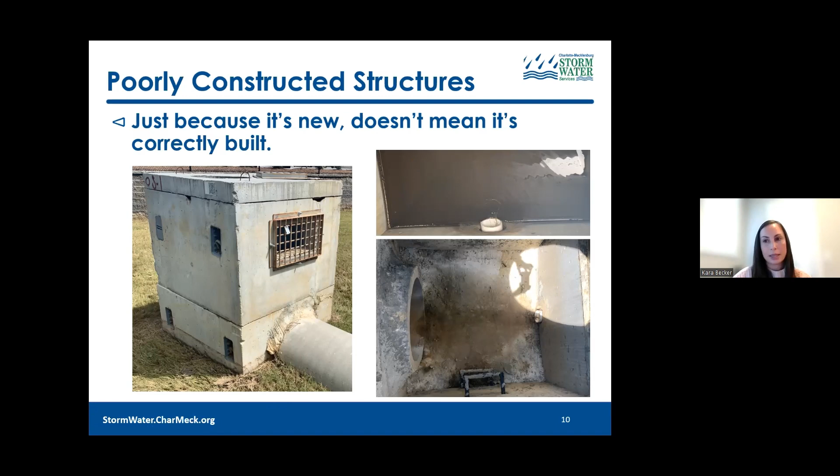And then unexpected encounters - we've actually run into people living in outlet structures. They just pop the manhole off and it provides a structure and a dry place for them to live in. So always make sure that when you're opening manholes or you see anything laying around there, like trash that looks like somebody is living there, make sure to avoid those places or make sure you have a buddy there just in case.

And also, make sure you're wearing good soled boots. We have run into needles, glass bottles, different things that we can step on that would harm us. You just want to make sure that you're really watching where you're walking when you're walking around the SCMs.

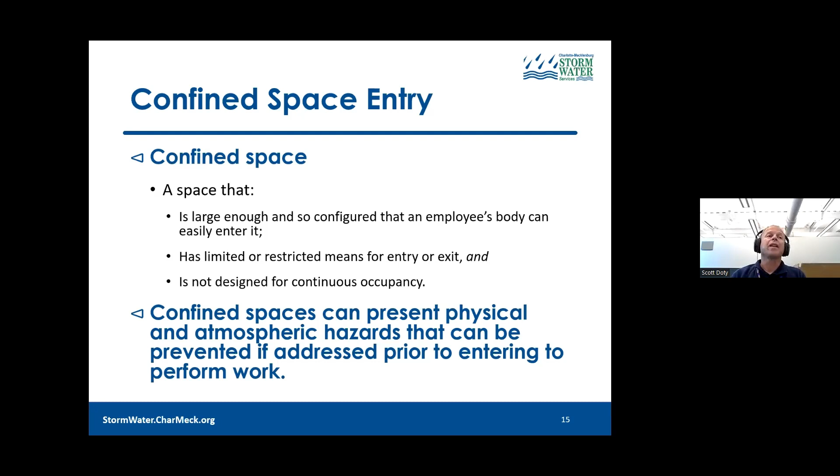Confined spaces can present physical and atmospheric hazards that can be prevented if addressed prior to entering to perform work. If you look into the 1910.146 general industry OSHA standard, or the 1926.1203 for construction, those are what govern how you go and perform confined space entries, whether it's general industry or you're actively constructing a project.

What is a non-permit confined space? It does not contain, or have the potential - and that's the big key right there - to contain any hazard capable of causing death or serious physical harm.

Whereas a permit confined space is one that has one or more of the following characteristics: contains or has the potential to contain a hazardous atmosphere; contains a material that has the potential to engulf an entrant, which is where you'd think of silos, or on active construction sites where you have deep excavations that can engulf the entrant; has an internal configuration such that an entrant could be trapped or asphyxiated by inwardly converging walls or by a floor which slopes downward and tapers to a smaller cross-section; or contains any other recognized serious safety or health hazard.

Prior to work starting, a competent person must evaluate the work site. What constitutes a competent person? A competent person must be designated by the employer and have knowledge of OSHA standards, ANSI standards, NIOSH standards, the same standards that Kara mentioned before, and be able to identify and actively and efficiently correct those hazards.

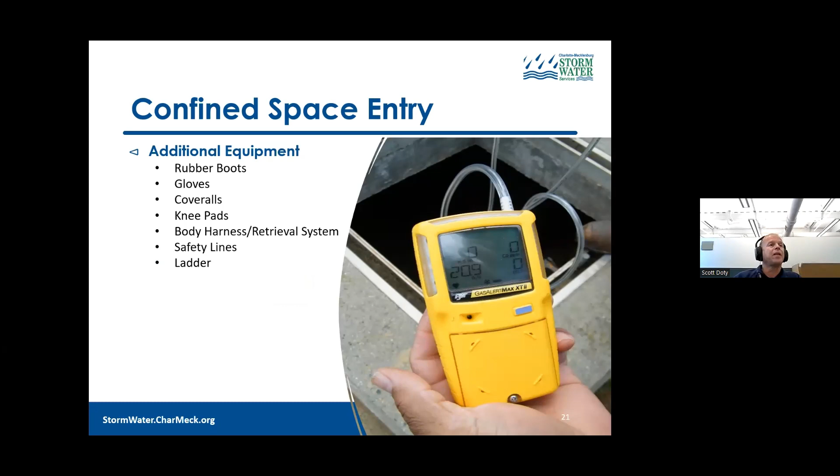Additional equipment: rubber boots, gloves, coveralls, knee pads, and a body harness retrieval system. You also want to make sure that daily inspections have been done on the harnesses you're wearing—make sure there's no cuts or tears. Your retrieval system should meet the new standard that ANSI and OSHA implemented earlier this year. You want to make sure you have your safety lines and a ladder if needed.

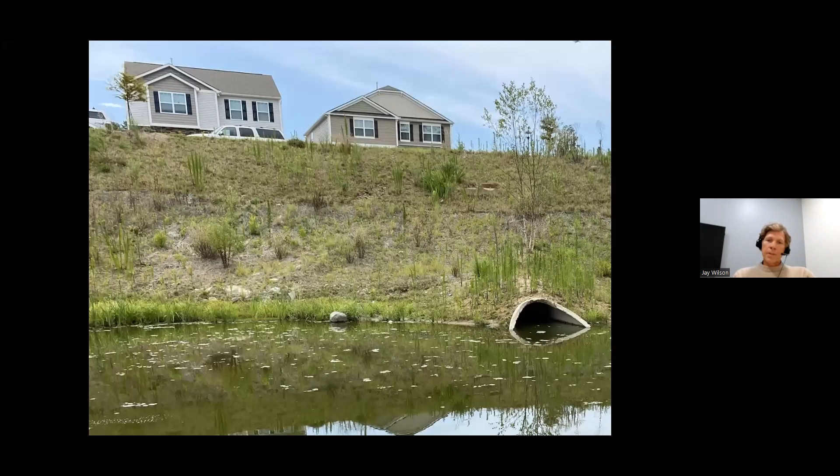Another SCM where you can see the matting on the lower part of the slope still, but it didn't help nurture the turf grass crop that was there, and you're seeing a lot of volunteer vegetation. So from far away, it might look like there's adequate vegetative cover, but if you look closely, you'll see that the majority of the ground surface is not shielded from raindrops by the vegetation, and that exposes the area to ongoing erosion and unnecessary maintenance of your SCM.

This is a common condition and something you should hopefully keep an eye on when you're out in the field. Regulators, while you're there during construction, these are things to point out and talk about during active construction, so they don't become an issue right at the jumping off point. And if you're designing or building and turning these things over, then this is something you would do well to think about early in the process: the final stabilization.

Inlets and flow diversion structures. A lot of these SCMs have flow diversion structures to divert a certain portion of the flow to the treatment device and allow the remainder to bypass the system. If you have a flow diversion structure upstream from your SCM, it's critical to ensure that it's operating as designed and free of trash, clogs, or some sort of damage.

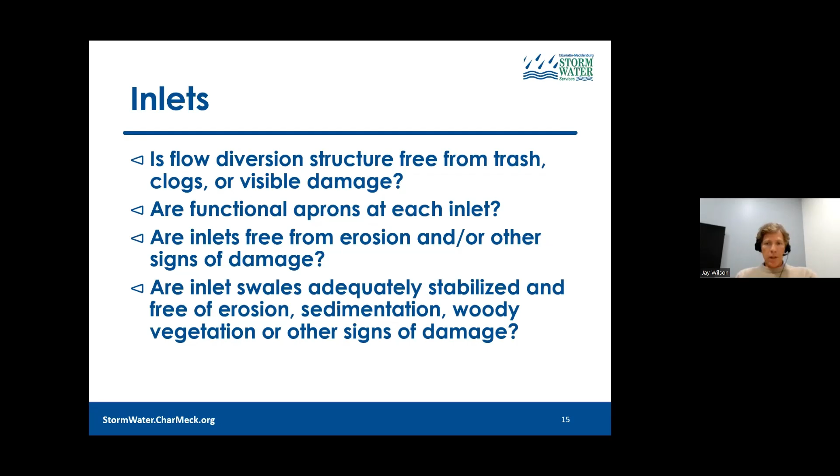Again, you need to have at least 70% cover with a permanent regenerative type turf grass or maintainable vegetative cover that is appropriate for the uses required from the facility.

Forebays and treatment cells. Some questions we ask: is the forebay free of excessive sedimentation? Does the forebay have a permanent ground cover with positive drainage and no sumps, holes, or standing water? This is a big one, a problem we battle a lot at the end of the project. Is the rock berm, if installed, functioning as intended? That means not clogged or covered in sediment or trash.

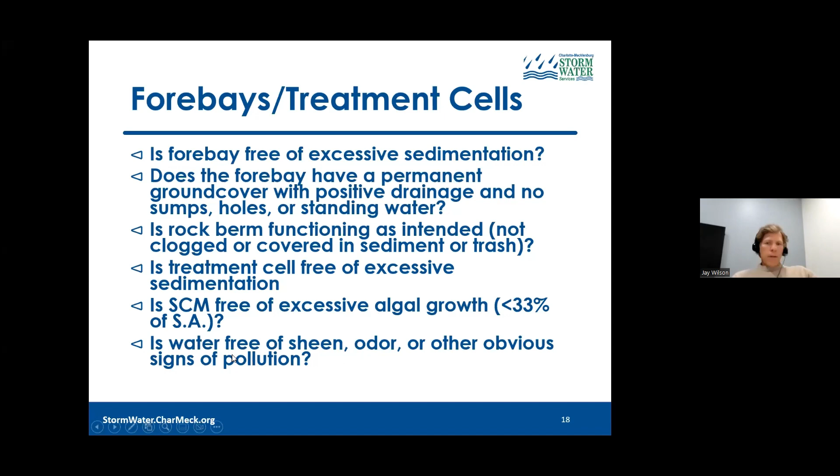Is the treatment cell itself free of excessive sedimentation and damage? And is the SCM free of excessive algal growth? For our purposes, we try to make sure we have less than about a third of the surface area covered by algal growth, usually only a problem in summertime months, or early summer, late spring. And then the catch-all: is the water free of sheen, odor, and other obvious signs of pollution?

Extended dry detention should have a uniform bottom with no sumps or holes, no standing water, with a turf type cover that is easily mowed or maintained.

It's important that these forebays have positive drainage all the way to the treatment cell. And if that means you have to actually design or build some sort of conveyance to move that water from the outfalls, then perhaps that's something you should think about during design, or with a revision if necessary.

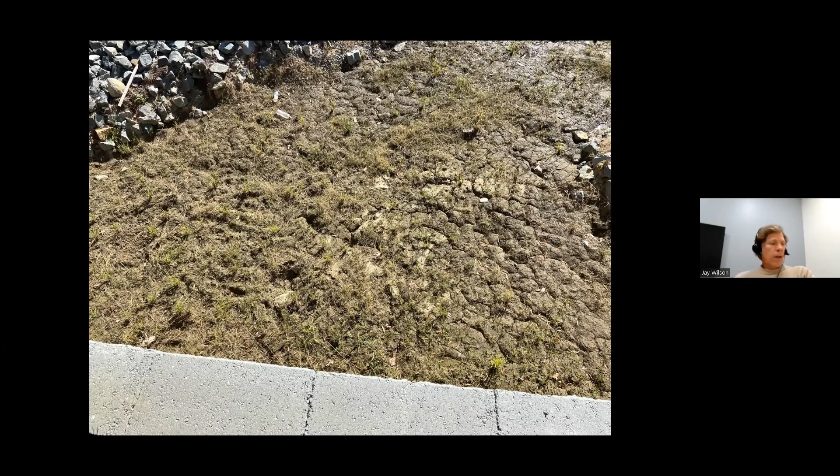Another picture of a forebay, and you can kind of see those deposited sediments. They've been saturated and dried out, and you start to see the shrink-swell. Again, that's probably not very compact material, difficult to grow grass on, and unlikely to drain properly.

Outlet control structures: are orifice weirs and spillways clear of trash and debris and able to function? Is the turn-down orifice protection installed if it's a wet pond? Is the trash rack and OCS free of other visible signs of damage? Does the OCS have steps installed? That touches back to the safety things talked about by Kara and Scott.

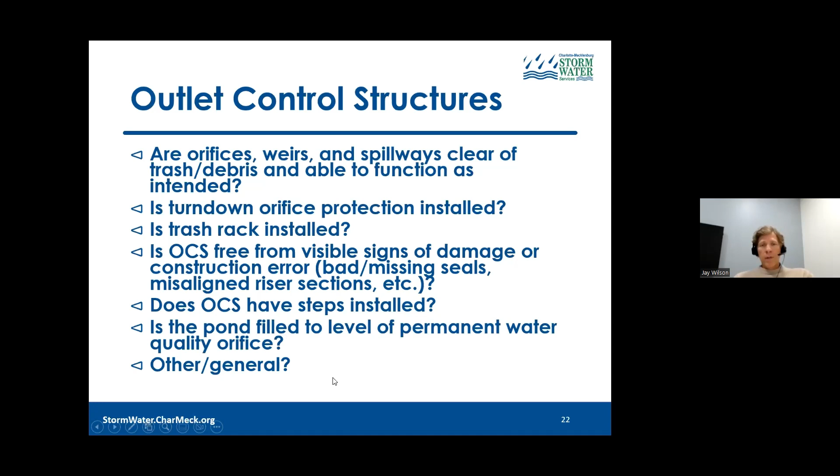And is the pond filled to the level of the permanent water quality orifice if it's a wet pond? Then other general observations.

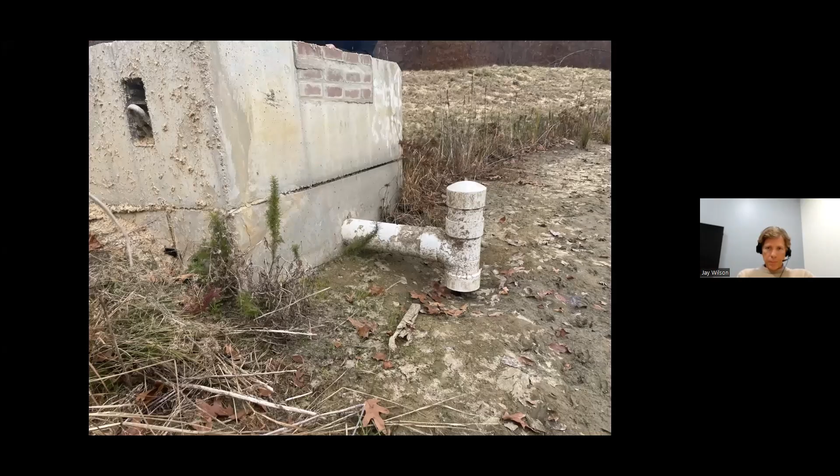Here's the turn-down water quality orifice protection installed. You can see in this particular wet pond that the water level was not at the permanent water quality level. This could cause a problem for acceptance. It will in Charlotte, and maybe in your jurisdiction.

If it's not holding water, we want to know why. It might be an extensive drought, or there could be problems with the riser or OCS.

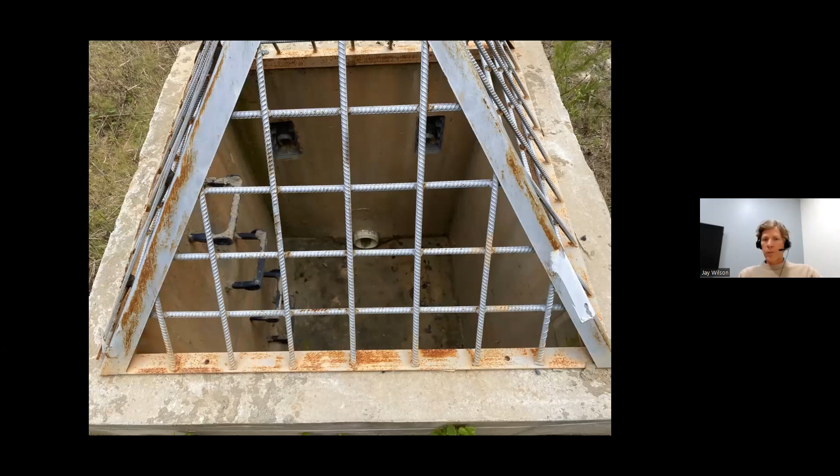Here's another one. Looks okay at first glance. Does anyone see the problems on this one? Some missing mounts. So it's important that not only are these things in the right place, but they have the right hardware. The little things can make the difference between success and failure. This is an easy fix, but just something that really shouldn't be like this at this stage of the operation.

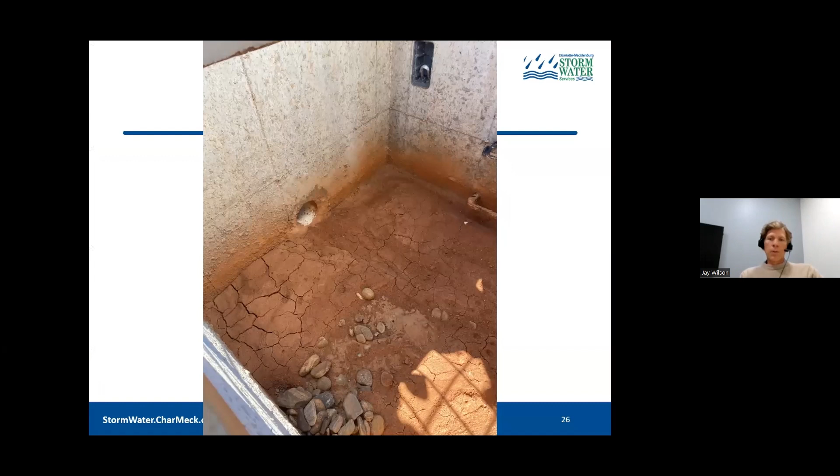We'll move on to outfalls. Is the outfall apron and ground surface at the end of apron free of erosion? Is the outfall apron free from obstructions that may inhibit or impair drainage from the barrel pipe? This last one is important, and we'll see why in a moment.

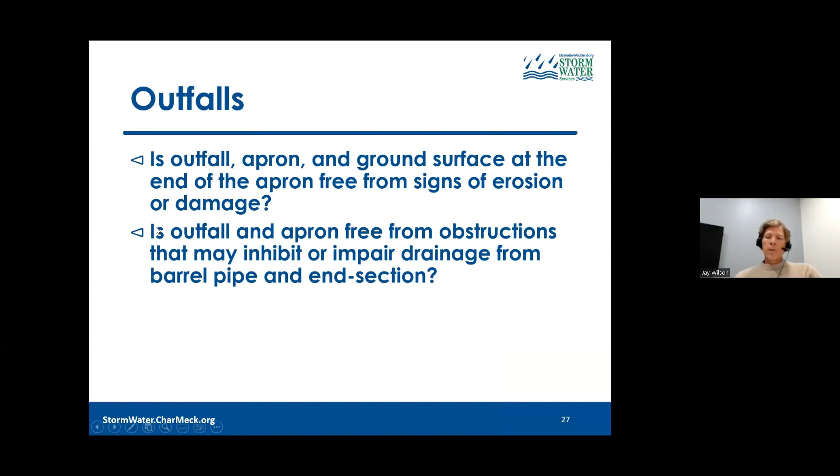So in general, we want to make sure that our outfalls are free flowing and that the grades and elevations at those points work out so that you get a good positive flow from the outfall to the receiving stream or conveyance.

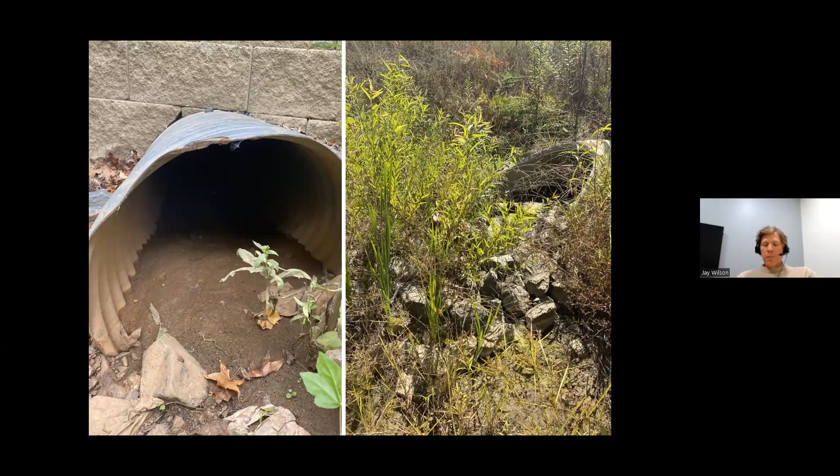On the right is familiar - I used that picture from the other inlet - but you can see there's some obstruction with black willow growing there, which could cause problems with drainage from that flared end section.

Here's another one where it's not woody growth or riprap mounded up, but there's been some deposition at the end of the flared end section. It's enabled the turf or pasture-like grasses to grow very well there, which you can't see from this photo, but it's caused about 4 to 6 inches of sedimentation to start piling up in that barrel pipe, backing up into the barrel and into the embankment itself. This is below an outfall that obviously needs a little help.

We'll run through these last things quickly. Underground detention: it's important to inspect these prior to as-built submittals. Are they free of standing water and free of excessive sedimentation and pollutants? Is the contributing drainage area stabilized?

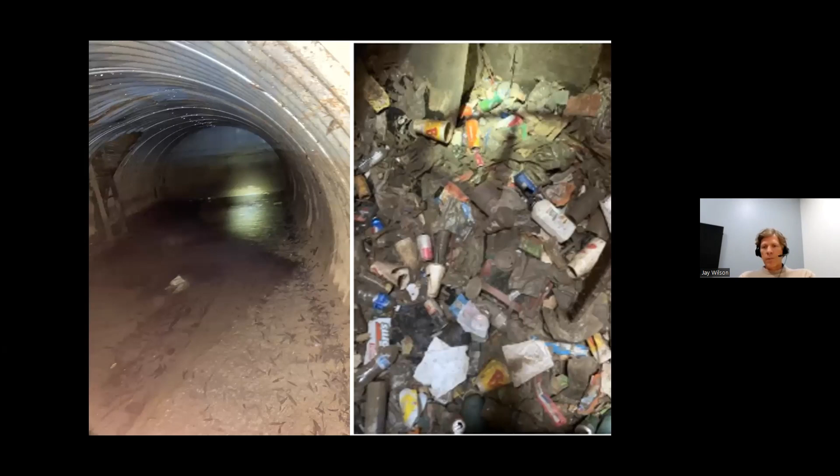On the left, you'll see an SCM, an underground vault with just too much sediment in it. It needs to be removed before final acceptance, and these things will collect trash and are a repository for all the nasty stuff that's around your job site.

Here's one where the water was staged up at a time when we really want to see the bottom of it. You need to make sure that your underground SCM measures infiltrate as designed, and that you're inspecting them during the best times to get an idea of those conditions.

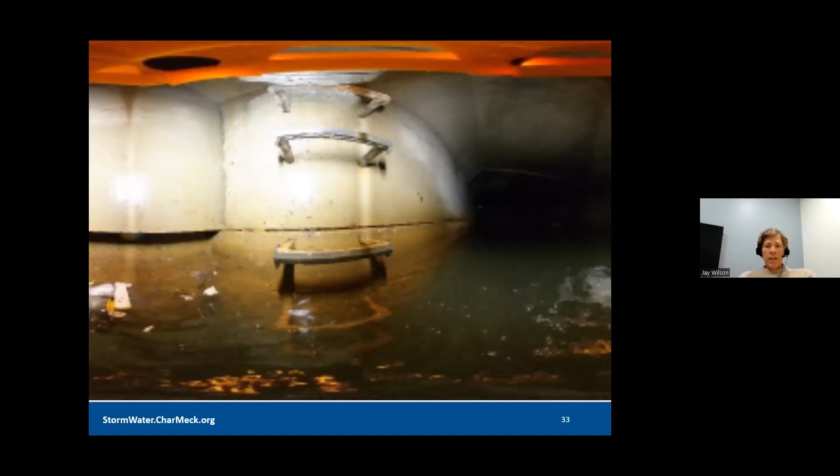This is just a nod to the conveyance. We'll skip over that. Embankment dam.

Is the embankment dam free of woody growth, and is the spillway stable and free of erosion? Is the embankment free of visible leaks and holes, including rodent holes, groundhogs, and things like that?

Here's a landscape, a planted tree on the embankment. In general, we do not want any woody growth on embankments, period. So if you notice this in your plan, it's probably a mistake somewhere. Try to identify that early and have it corrected. More likely, we are going to see volunteer vegetation.

Here's the yellow poplar on the left, growing on the spillway embankment, and here's our good old black willow. I included this picture quite a few times because I wanted folks to really understand this is a tree. It will grow into a multi-stem tree very quickly, and it can cause a lot of problems in just a growing season or two. You need to stay vigilant for these and remove them as they're seen. Also, there's some cattails popping up there.

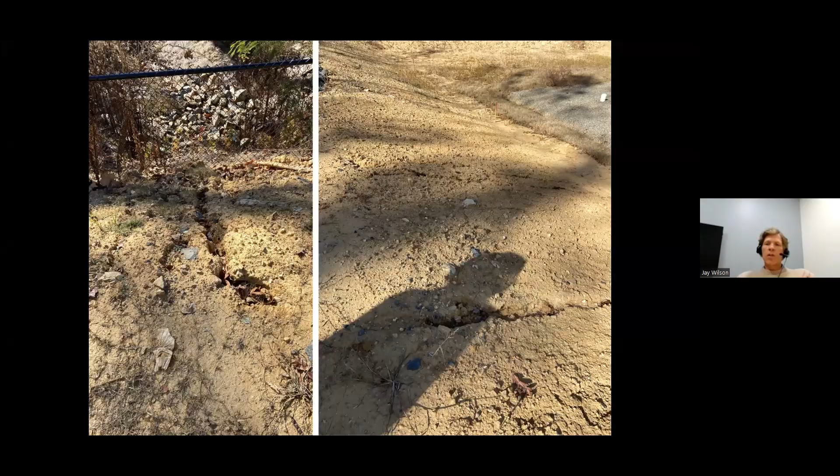Here's another issue I thought was interesting. This rock coffer forebay has a weir notch that is adjacent to the earthen embankment. In big flows, all the water is going to scour around that end and wash away this embankment, particularly since it is unvegetated. I always try to keep that low spot for the weirs in the center of the structure.

This is supposed to be a sand filter. Enough said.

Some other weird things we've run into: this SCM didn't show two standpipes, and we were wondering what the second standpipe was for. We've seen this a few times. This SCM did not show the roof leaders discharging into the main treatment cell, it showed them discharging into the forebay cell. Make sure your as-builts are showing true-to-life conditions.

Final notes on pass-fail conditions: at least in Charlotte, pass and fail will be based on conditions at time of inspection. It's important to think about that vegetation early on and verify critical elevations, particularly at outfalls and inlets.

Forebays for dry detention SCMs need to be addressed early on, particularly to address those drainage problems. My advice is to lean into the details. Make sure you know the manuals you're working out of, and make sure you're reading the details on your approved plan. If things don't work out between the details and the plan, bring those issues up early to the PMs, designers, and regulators to address it, hopefully minimizing complications further on.

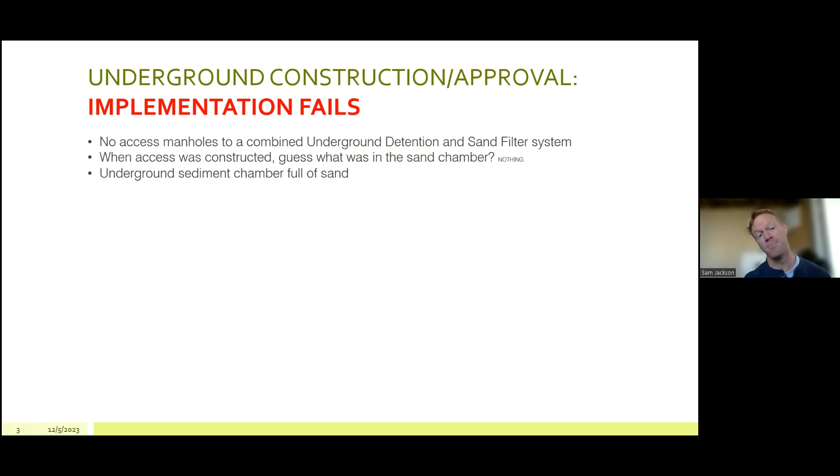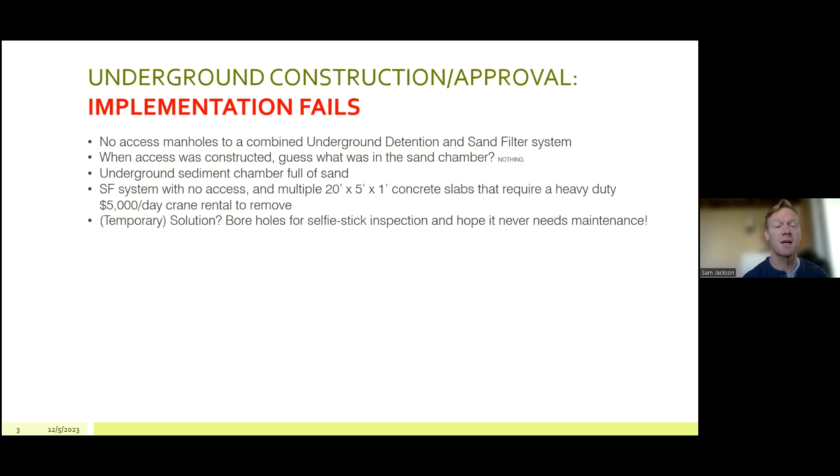And then the mundane but extremely costly sediment deposition issue. An owner, whoever inherits this first year inspection, finds extreme levels of sediment in the pipes, and then it has to be vacuumed out first thing.

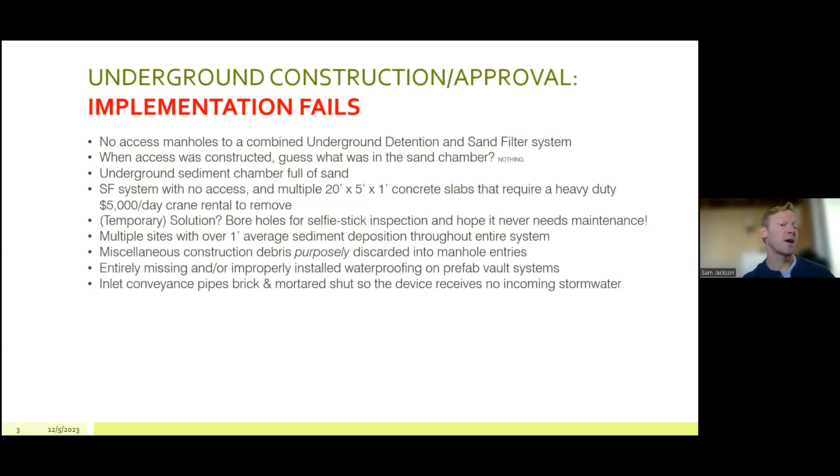Using the underground system as a little bit of a dump: missing waterproofing, so there's obvious leakage of water, of sand, bricked over inlet conveyance pipes, no drawdown orifice on the weir wall for the underdrain, so it's all going through upper orifices, obviously not per design.

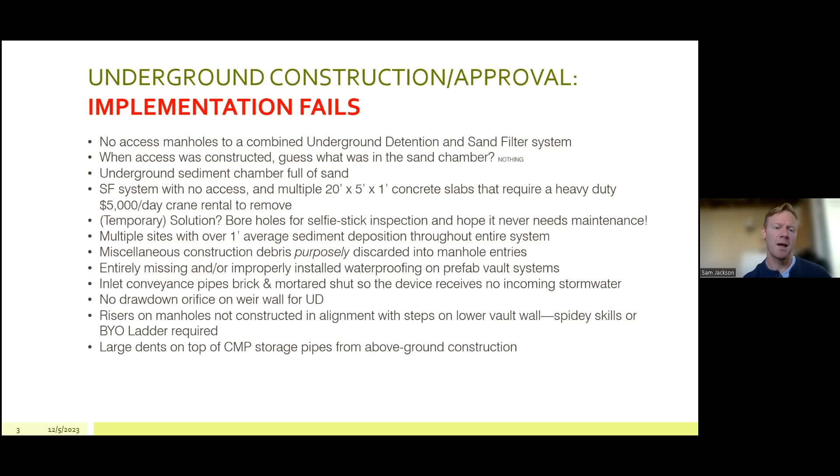This is a personal favorite, when we look down that hole and find the ladders all wonky, like somebody's trying to create a Spidey skills course for us. We usually just bring our own ladders. And dents in the storage pipes from construction.

Just a plea on this first slide, there's a lot of text here, so you can screenshot it and you'll have access to these slides later to bring to your staff meeting and say, hey, maybe this hasn't happened to us as a regulatory body, but it could. And then fingers get pointed and it gets messy quick.

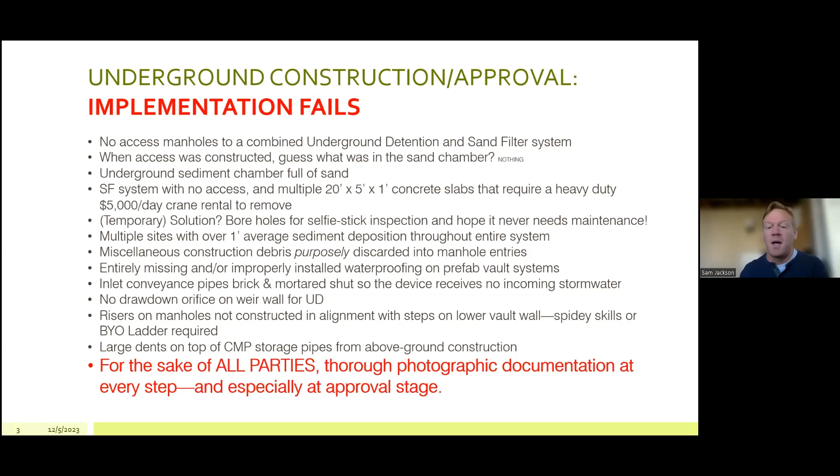So one notion would be to require thorough photographic journals: here's pipe 1, 2, 3, not just glamour shots, but this is how the pipes actually look, these are the access points actually implemented, this is the sand chamber actually with sand, timestamped photos, a photographic journal. That way, if there's an issue downstream at the first inspection report, for example, there's able to be a responsible party clearly identified. This is how it looked, it was done, we can prove it right here. Instead of an HOA getting this and saying, what the heck are we supposed to do here?

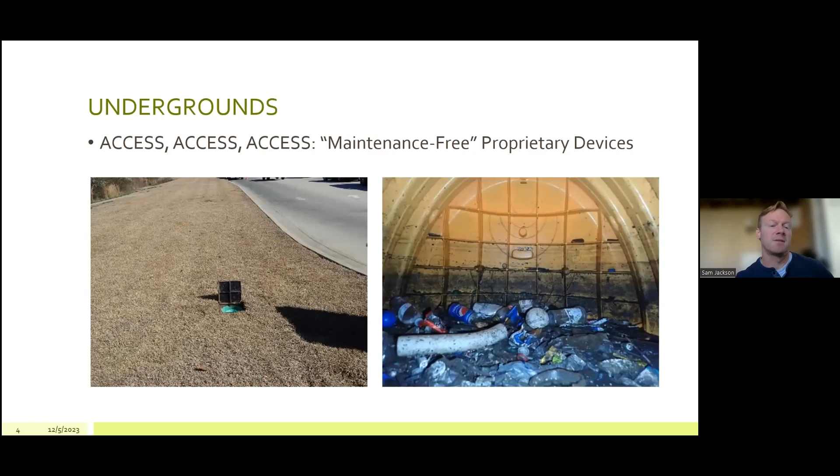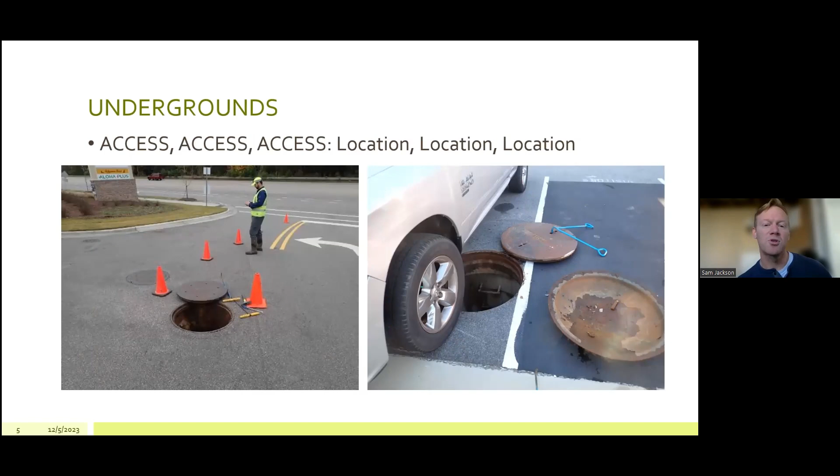That is the only access to that underground sand filter, so redundancy would be helpful to design in. On the left, push that manhole over into the striped space and we're golden. On the right, huge parking lot, and the one car in the lot of course parks in the far back space, right over that access point. Could that have been striped over? Could we incorporate more striped spots with manhole covers there? Just ideas, thoughts for consideration.

I think sometimes when these are reviewed, you've got one page with the access points and another page with the site plan, not necessarily seeing the two together. Because yes, there are adequate access points, but where are they in relation to how the site is actually developed, high traffic areas or parking spots?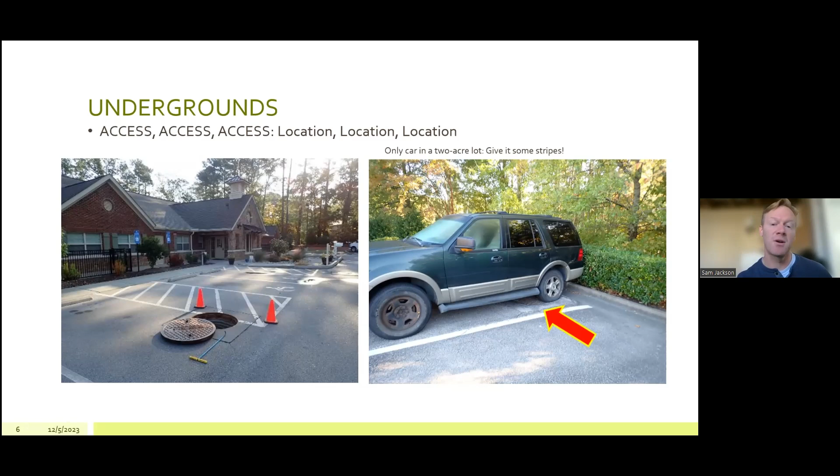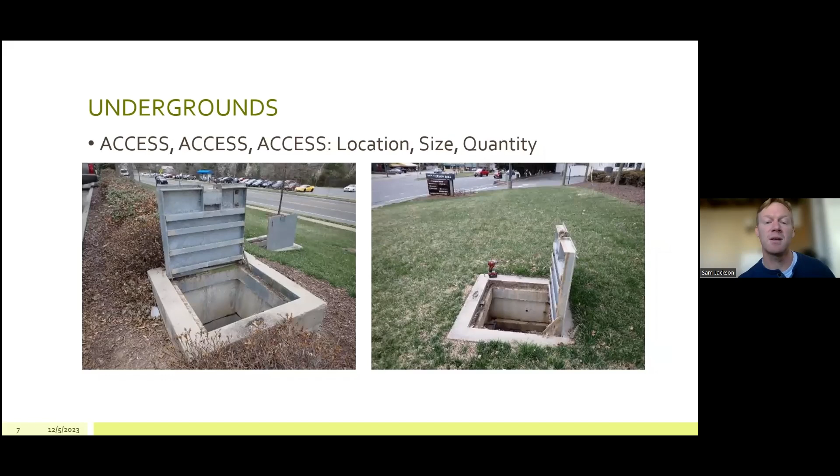Here's a beauty that we love. Nobody parks there when sober, at least in the grass. Great size, Bilco access doors, easy to get in and out for inspections, etc. Redundancy, not crazy redundancy—I'm not expecting like six—but there should be more than one way to get in there for maintenance and inspection purposes for any device.

Okay, switching into another design that we see a lot of, and I'm speeding through. I'm a reformed Yankee, but we've got a lot to cover, so I'm going to try to hit it all.

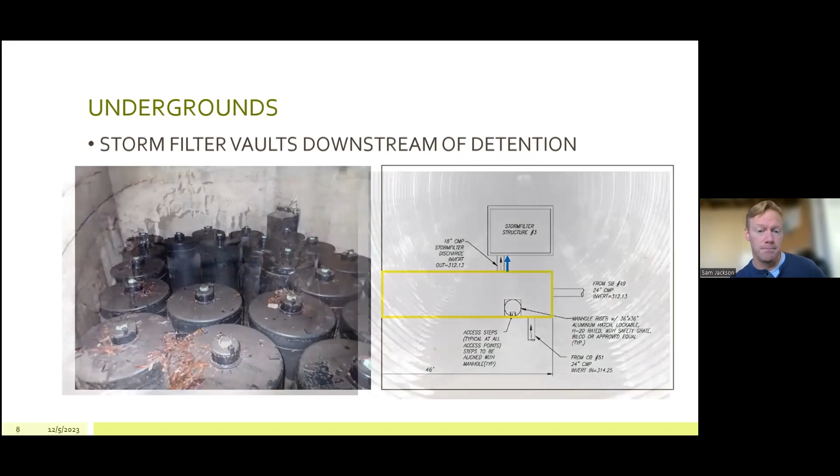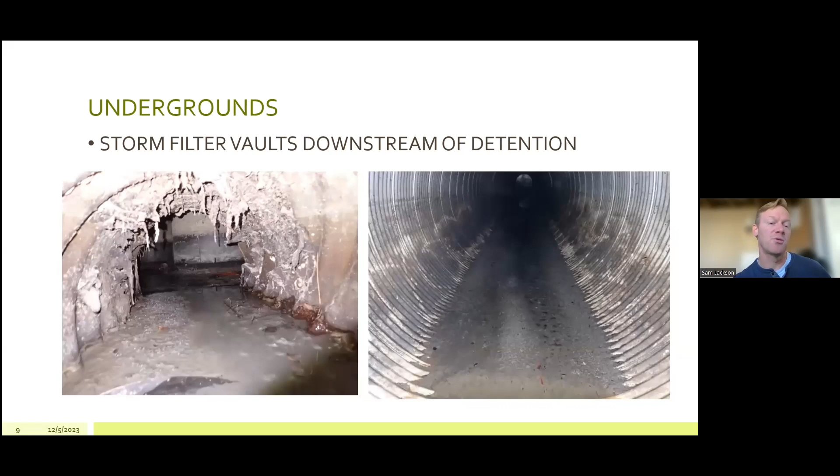Storm filter vaults downstream of detention pipes make a lot of sense, checking the boxes as far as detention and treatment. But in reality, all of that stuff in the pipes is discharging into that vault, and those cartridges were not designed for that kind of load. So it's fouling them up, reducing design life. You're not getting the treatment and you're having to replace them far more often than expected. How do you handle that? Again, bright minds on this call—it'd be lots of fun to have a roundtable discussion to think about how we make sure the sediment doesn't get to those cartridges.

Here on the left is an attempt at a retrofit, at least for heavier debris and trash, to block that from the storm filter cartridge vault. You could have some heavier mesh to stop the sediment, but then you're going to have to clean that up. What can you do? Over on the right, here's eight pipes all discharging—if you follow that arrow—to the junction box and then the vault. There are possibilities with a junction box like that. So if your site allows it and you can fit one in, is there a way to help the sediment settle in that spot so it doesn't all get in here? A lot easier to clean it out from here than when it gets there.

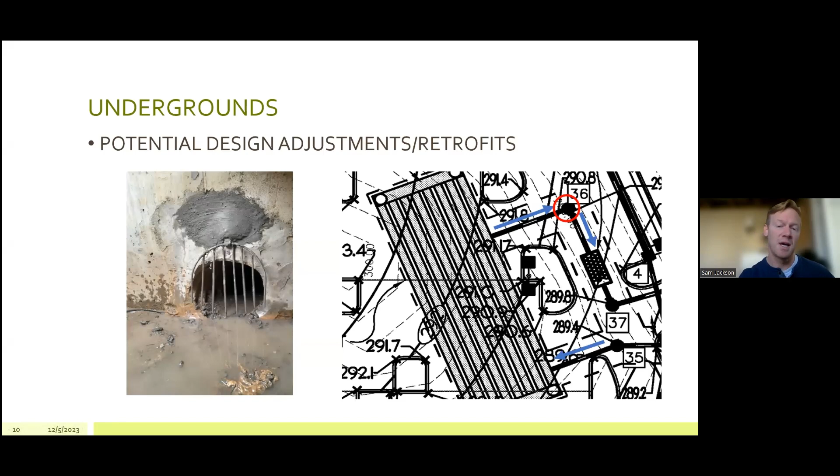So just a design consideration, whether you're a consultant or a regulatory agency—suggestions you can make and points you can raise as far as concerns for how those underground detentions are going to foul up the cartridges downstream.

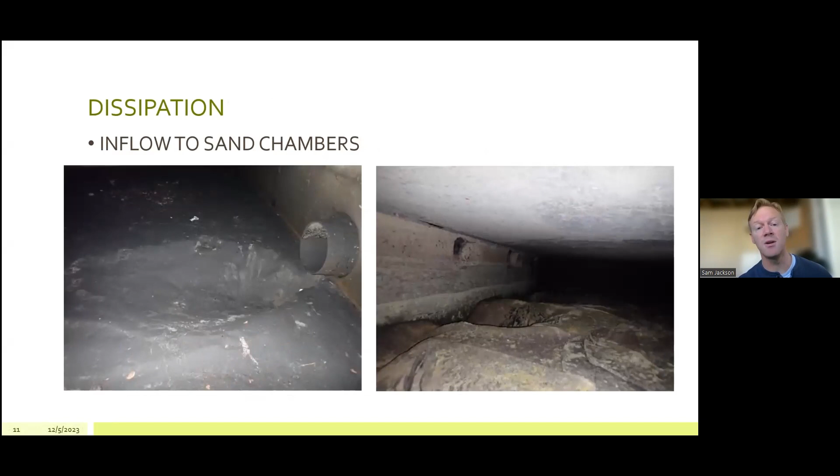Maybe a simpler issue with a simpler solution, but what we see a lot of is no provision for armoring of the discharge from a sediment chamber into the sand chamber, with obvious results with that level of scour. With a higher pipe, you get that much scour. You get this waterfall coming in from the sediment chamber with obvious results.

There are straightforward solutions as far as riprap armoring with non-woven geotextile fabric underlayment. This probably could be contoured a little better, a little bit more beefy. Probably these are retrofits, so if these things can be specified, there'll be more awareness of this being an issue, and then it's in the design and can be implemented.

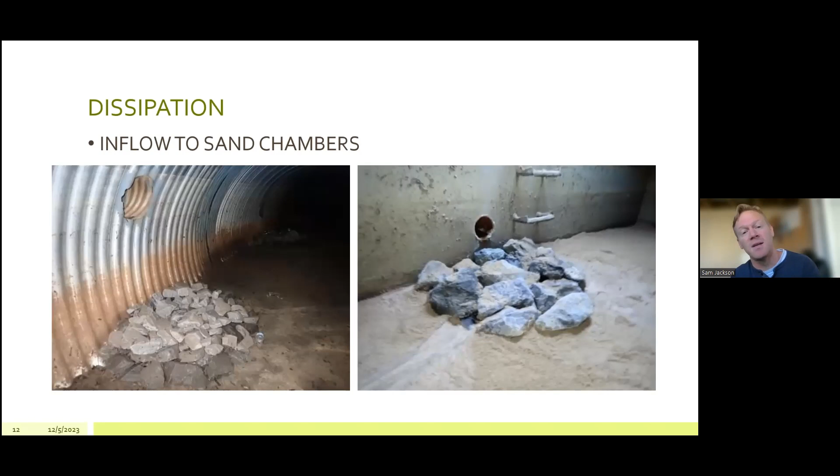So it was a pretty perfect photographic journal submitted showing, hey, this is showroom ready, and if you have a problem with it first year, that's on you because we finished the job. As far as I know, that photographic journal did not exist, so that's just on whoever happened to inherit this to deal with the repair and fixing it up. Again, great design, great ideas, but they've got to be implemented, and there's got to be accountability for that implementation.

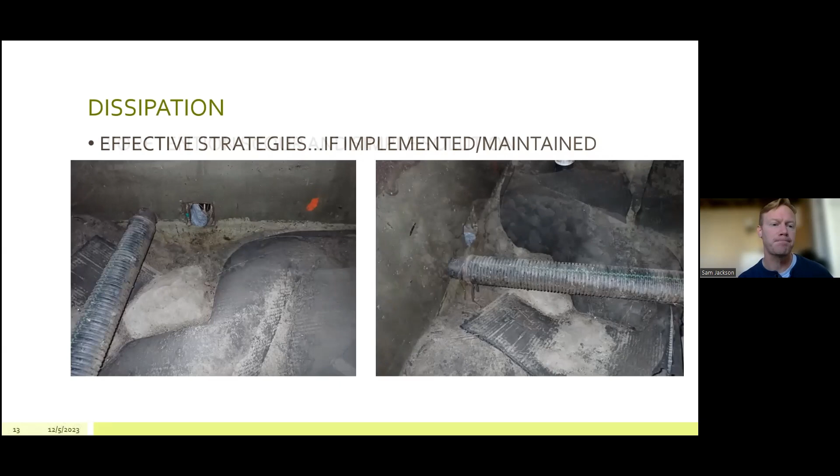Speaking of plants, compliance issues, making it work with planting plans. I've seen so many gourmet multiple zone planting plans that are so aggressive and ambitious, let's say. But the MDCs require 6 feet of shelf, and they require 3 species. And that shelf can be all below, all above, or overlapping that permanent pool line.

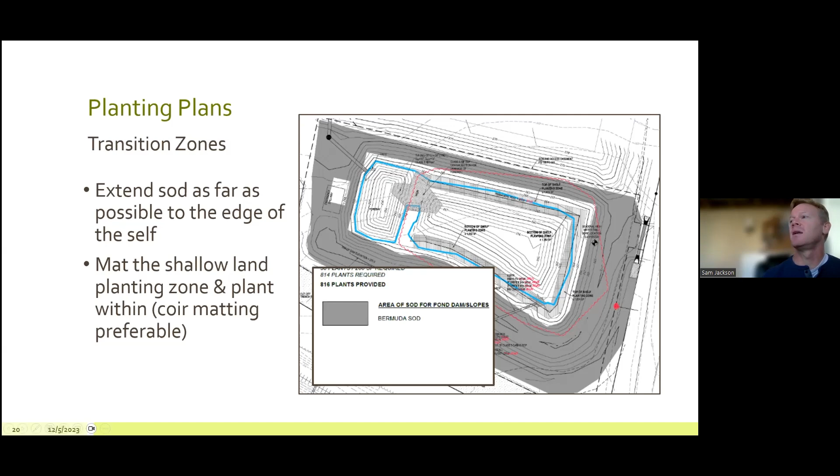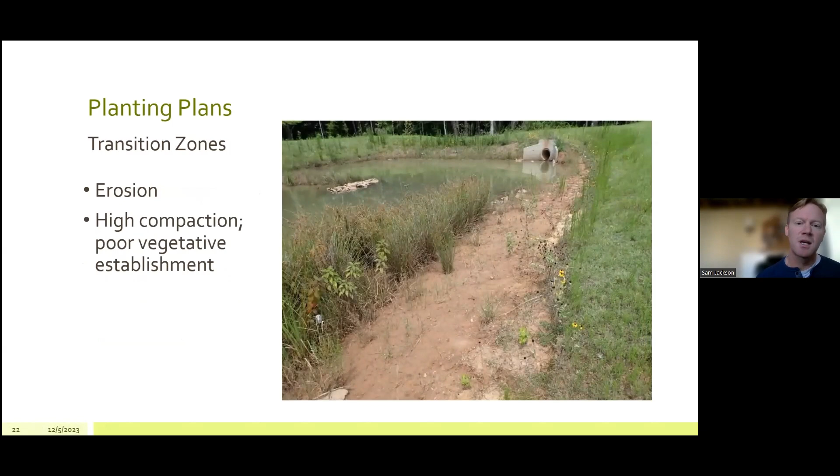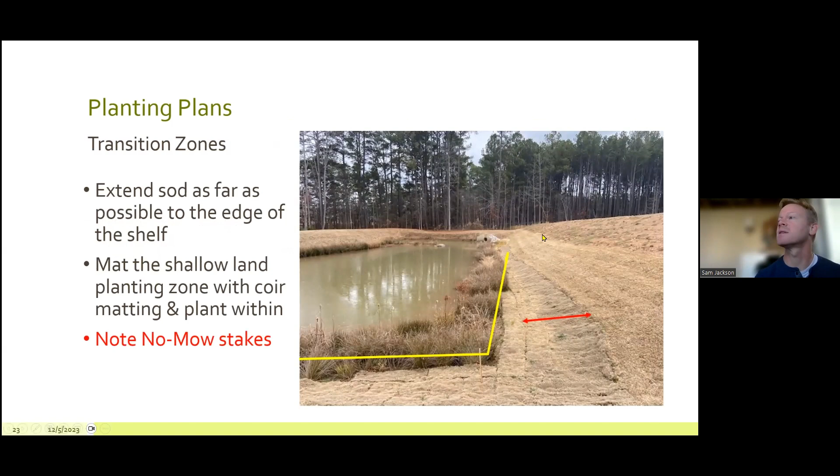But in this picture, you'll see that sod does not extend far enough. So what do you get? You get this, and that's not just going to naturally fill in. You're not going to turn a construction site into a golf course lawn just by natural processes. So extend that sod. Note these nice no-mow stakes to protect against predators - weed whacking predators.

Downstream from that, if it's in maintenance mode and you're having to deal with a shortfall or erosive issues, planting with some nice heavy coir matting is a good way to go.

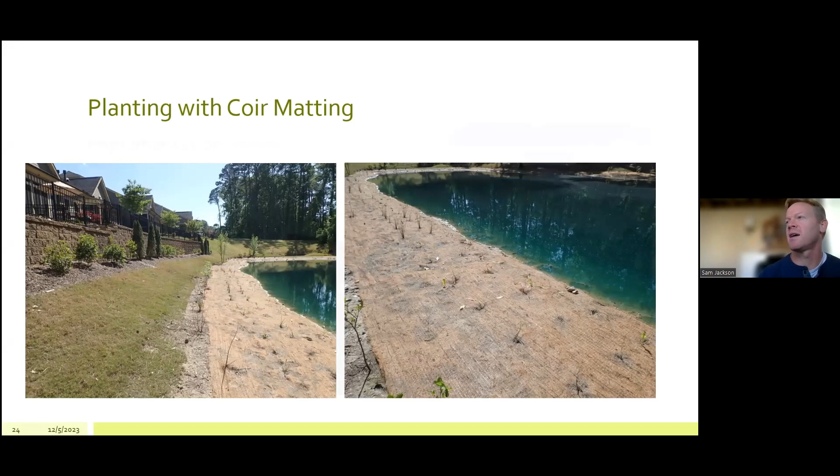In general, planting plan implementation, location and construction stage go together, because you don't really know your location unless you've reached a point in construction stage where you've established your drawdown orifice and the drawdown rate. And then you can say, all right, here's the shallow land, here's the shallow water. Let's make sure we get these in the right place. Otherwise, it's a death sentence for those plants, heavy costs for that replanting.

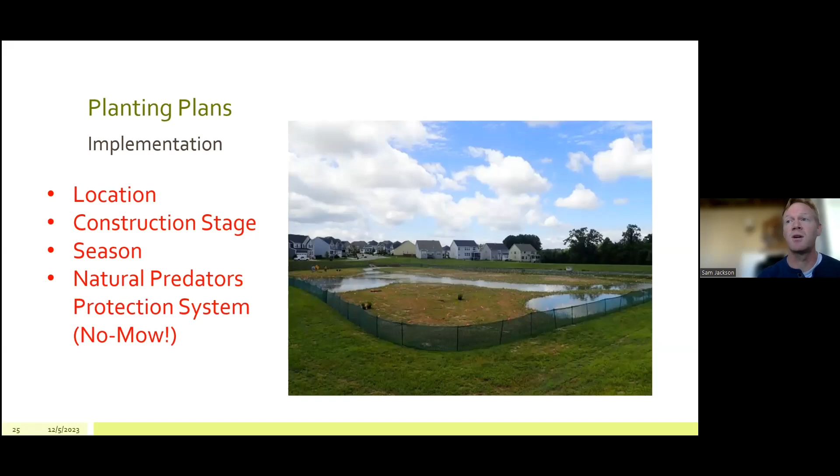The season - late spring, early summer - give it as long a growing season as possible to establish, but make sure you've got natural predator protection systems: the fencing, and the lineage across with a nice pink frilly stuff to prevent goose depredation. That fencing is helpful for stopping the geese.

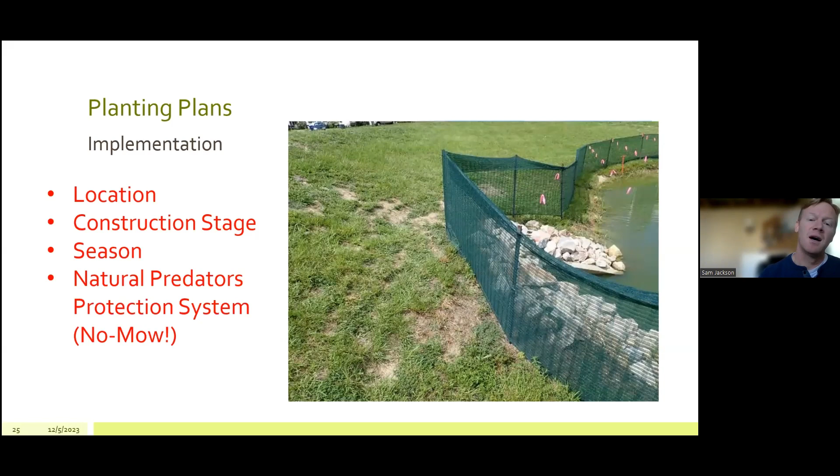It's also helpful for stopping the other natural predator, which is the weed whacker wielding Willie. He's probably not going to take his weed whacker over that fence to get a nice big one. And no-mow zones - we wish we saw more of these spec'd, because they're so beneficial just to keep that area vegetated.

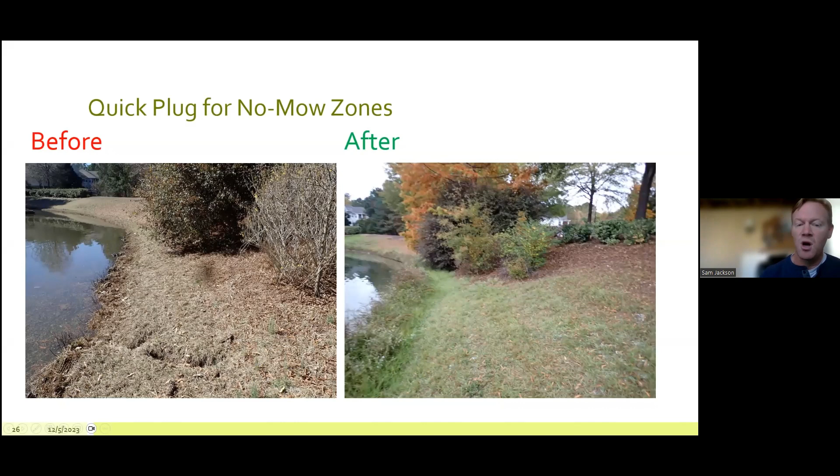In this case, this was one that was in maintenance for a while, and we've been fighting them to just let this area grow, not with gourmet plants, didn't have to be any special planting, just let the natural herbaceous provide stability for that shoreline. If you don't put in the protective stakes, then you're asking for it, as you can see here.

These folks are paid per hour to take out vegetation, and that's what they're going to do unless you provide the stakes and it's very clear. And even then, they might ignore them, but at least you can try.

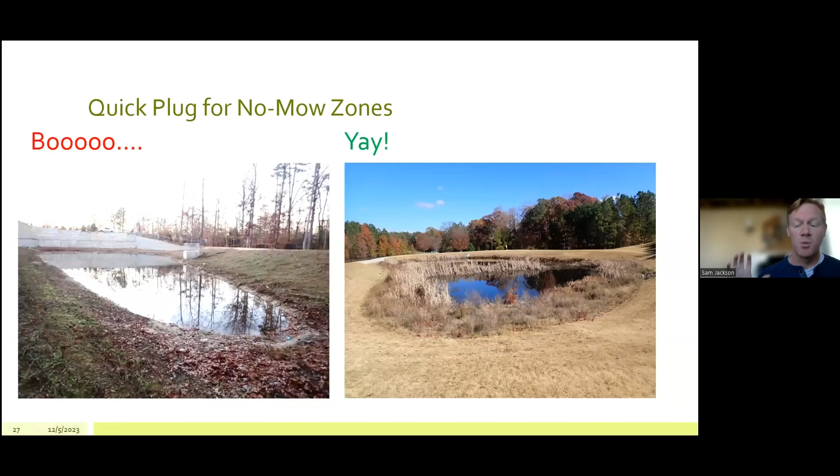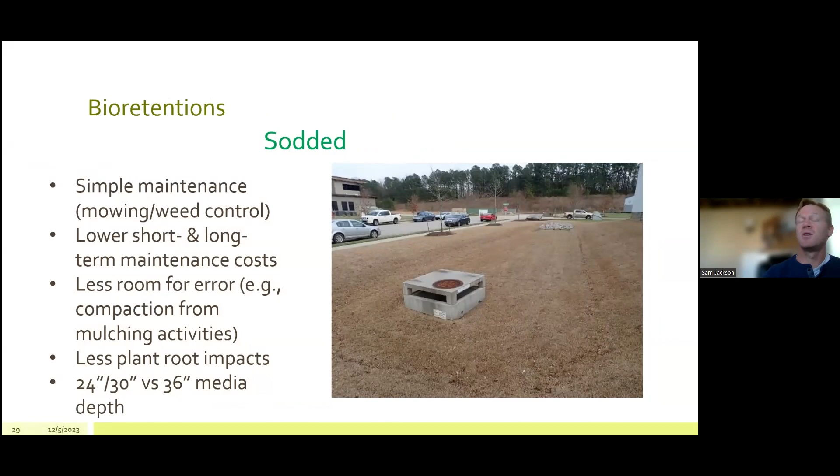Quickly, bioretention, sodded versus mulch. These get the same credit, but we see folks wanting to do the mulch and want to make it pretty, but pretty is expensive. Sodded, you don't have to have as deep, so if you're dealing with seasonal high water table issues, as far as the depth, that can be an advantage.

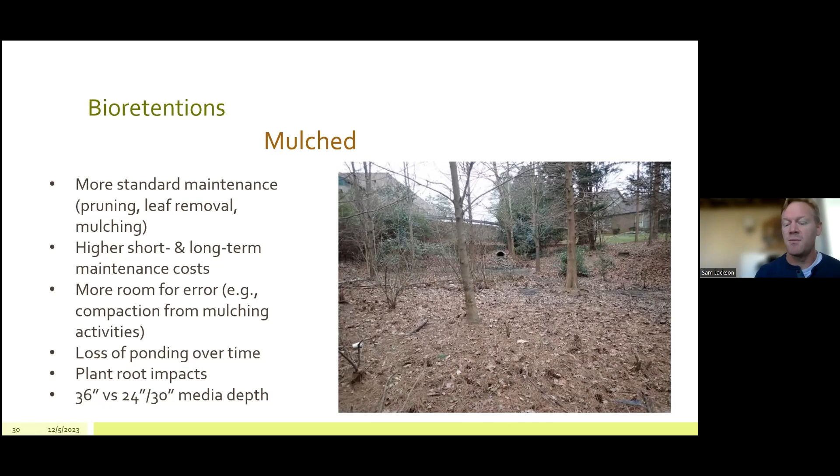But when you're doing mulch, right off the bat, 2 to 3 years max, you have to remove and replace. That means taking that mulch all the way down to the biomedia layer, getting rid of that and putting in the fresh shredded stuff. If you delay and don't do it, then you've got fibrous roots building up in the mulch. You've got to till it to break it up and then remove it. Not to mention, you're trying to keep these beautiful plants up versus trying to maintain some grass, which often can get very happy in the bioretention environment.

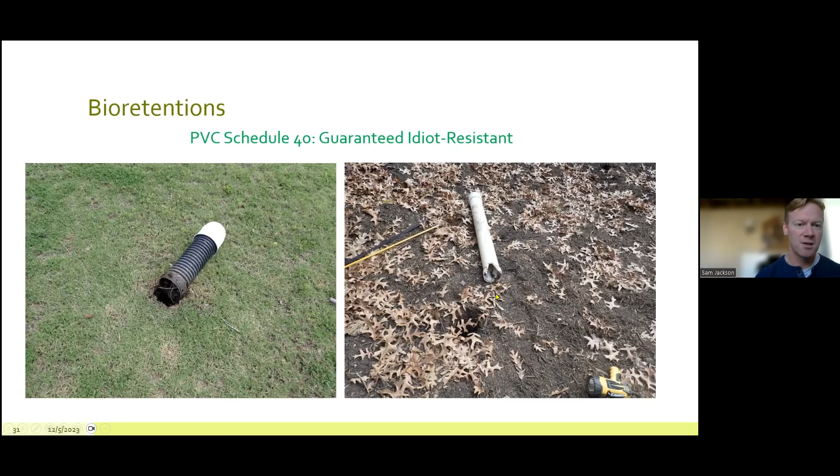Please, PVC Schedule 40, guaranteed idiot resistant, thanks to my boss, Durham, with that phrasing. You can't idiot proof it, but PVC gets close to being idiot resistant. If you put in this HDPE, a toddler can knock it over. At least this takes some real intentional idiocy to take out a PVC Schedule 40 upturn there.

If you have IWS, if you're required to have an underdrain per the MDCs, then you're also required to have IWS. And we see folks with that upturn inside the riser, just making it so snug, you can't get at it to grout. You have to dig it from the outside in order to seal that because it's so tight there. And there's no way to dewater it without pumping it down.

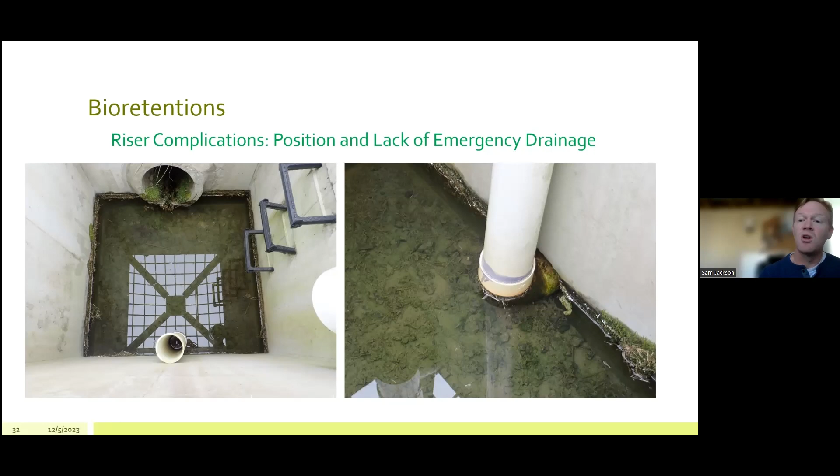I don't have a pretty picture of this being implemented. There's clearance here, and there's a cap there that you can screw off if it weren't grouted in. So no clearance at the bottom of the riser, and no way to draw it down, although at least probably in the design there was.

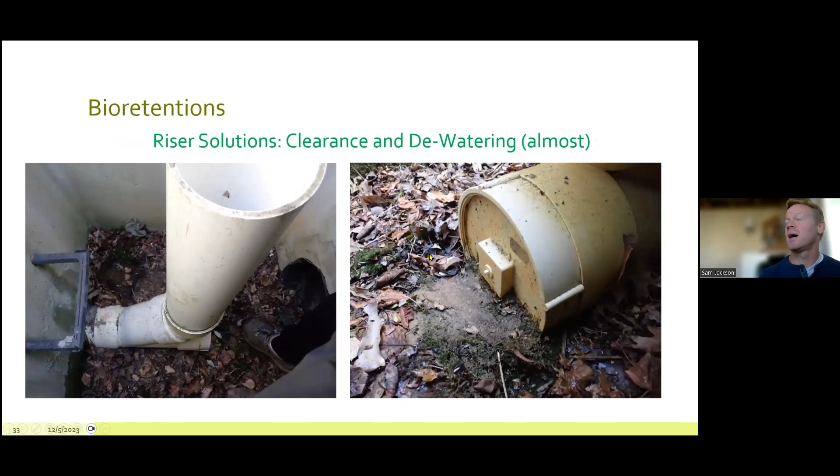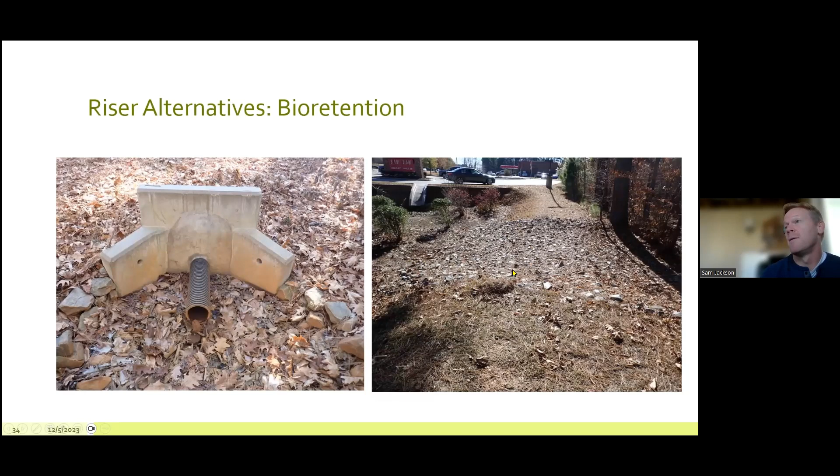Maybe get rid of the riser altogether with a bioretention if your site allows it. This is a nice one where the discharge comes straight through the shallow dam, and over here you've got overland flow into this wooded area, so no riser necessary. If that's possible, consider it. Avoid all the issues that risers create.

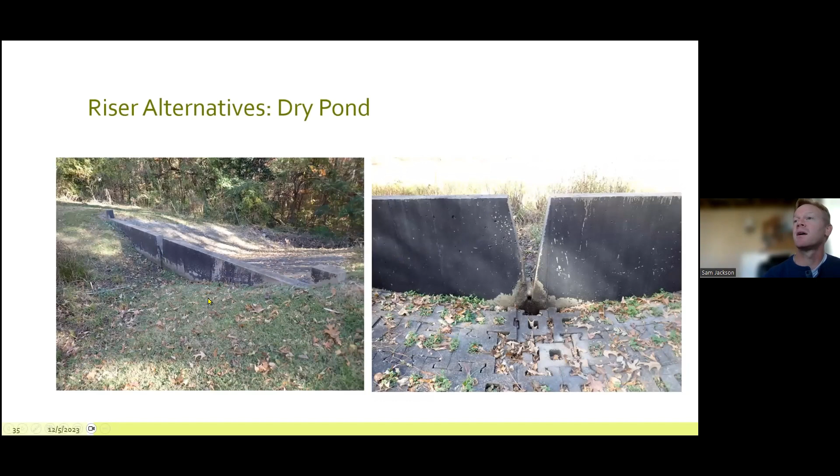Similarly, a dry pond could work that way. There's a nice V-notch for the design storms, but this is the spillway that carries the flow, and you've got your drawdown orifice built in. Another example with a dry pond with that notched weir and spillway structure and the drawdown feature.

And even for a wet pond, there are circumstances where that would work. Again, trade-offs, not always solutions, but we see so many issues with risers leaking, with principal spillway pipes. You've got to get your concrete cradle, your seepage diaphragm, all of that just right. So much potential for error, and always potential for error, but there are possibilities here worth it to keep the conversation going.

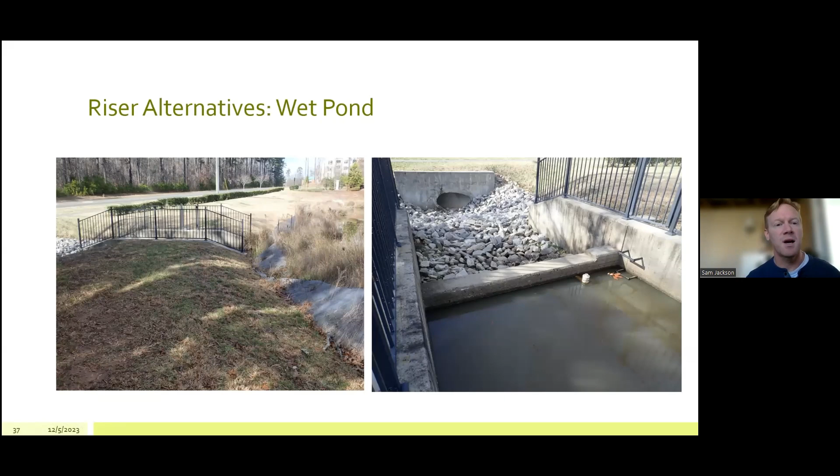I'm going to put my email address back up there, say thank you very much, and look forward to further conversation. Thank you.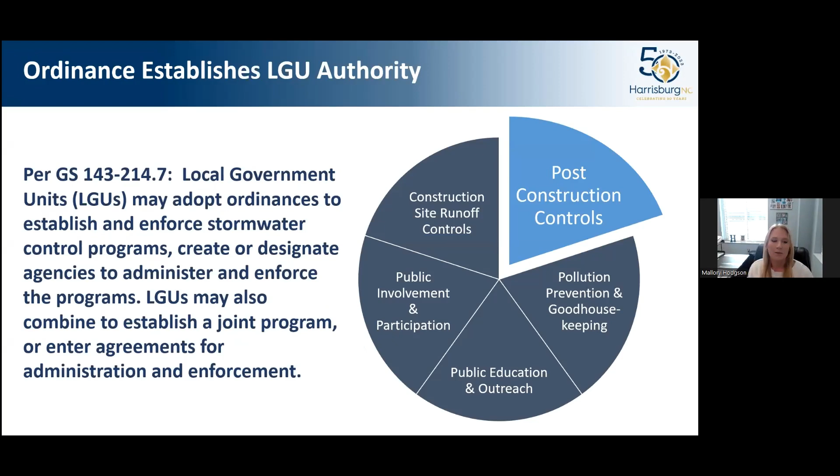So this gives us a ton of flexibility on how to manage the program, but post-construction controls is just one slice of the pie, so to speak.

So the post-construction stormwater program is established in the North Carolina Administrative Code, and it sets the basis of technical guidance maintained by NCDEQ. The state has tons of guidance on the measure of effectiveness for each stormwater control measure, specifications for design, installation, and maintenance. MS4s or municipalities have the ability to add supplementary design standards, but can never be less strict than the state guidance.

One example I like to use here, relevant to Harrisburg, is that we require all of our wet ponds—I love that phrase, wet pond, it's so redundant—to be installed with fountains. However, the minimum design criteria for wet ponds has fountains as optional. We add it to increase dissolved oxygen in the water. It aids with nutrient removal and helps support aquatic life. And the motion in the water, we've noticed, also deters waterfowl and mosquitoes.

So as you listen to this presentation, consider what additional standards would be beneficial to your community and supported by your leadership.

And the last thing I want to note for the designers on the call: if you're unsure which program a municipality is covered by, NCDEQ maintains a post-construction program map with a lot of information for each municipality and which program they might fall under. So if there's a watershed ordinance in place, or if they're just governed by a local ordinance, that information is available online.

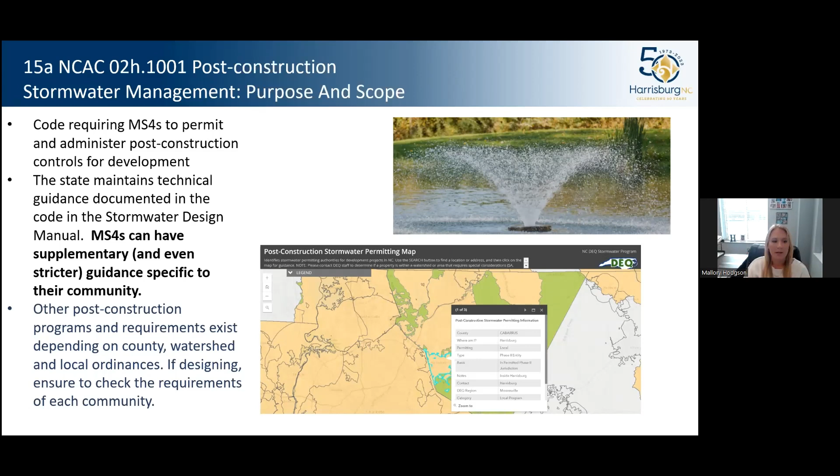So I'm going to get into the nitty-gritty of some tips for smaller local governments. Now that I've set the framework for post-construction ordinance, I'm going to talk about how to actually enforce and administer post-construction controls. First, getting funding and resources, how to enforce ongoing maintenance, how to lean on your consultants, the benefits of maintaining an inventory specifically in GIS, and using other minimum control measures that are part of your phase 2 permits. Then I'd like to talk about a few lessons learned that the town of Harrisburg has had.

So my first tip for getting funding: run your stormwater program like a business. Permit compliance does not need to come from stormwater utility fees or your general fund. If your municipality hasn't established a stormwater fee at all for its customers, a perfect place to gain revenue is to establish review fees, annual reporting compliance fees, and inspection fees. These are services you have to cover, but they don't have to be free.

Adherence to the post-construction minimum control measures requires that staff or a consultant review the construction documents. It's required by state code, but that doesn't mean you can't pass the cost on. So for post-construction reviews, I would recommend either setting up an MOU at the onset of plan review to directly pass those costs through to a consultant, or you could calculate fees as a fixed rate based on acreage, linear foot, or a base fee.

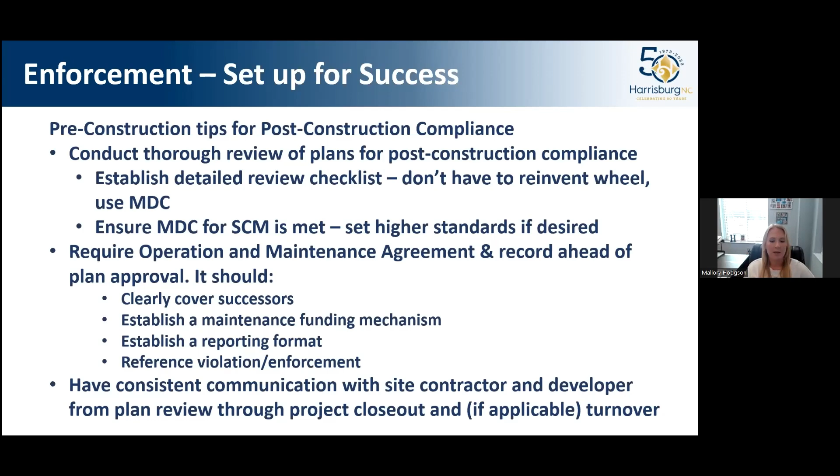And if it's absolutely not feasible for them to submit that, we've in the past sometimes bonded things. That's not our desired route, but it is an option. If it's going to be something that we may not be able to get them to come back to do, at least the town would have that surety in place to go do that.

A few more tips - so now you're under construction, construction's coming to a close. Now how do you wrap this project up to improve post-construction compliance? One thing we do at turnover is conduct a meeting with the HOA or whatever business entity is going to be maintaining the stormwater control measure, especially if it's different from the developer. We require that, and we go through a few tips for maintenance.

Sam talked about maintaining that buffer, the planting buffer - we talk about that. We talk about finding a landscaper who knows what they're doing when it comes to stormwater control measures, making sure they're not mowing the whole thing down. We point them to our stormwater design manual and where they can find those inspection reports to share with their engineer or whoever is doing their annual inspections.

And then before we release the subdivision, before we issue a CO, anything like that - in addition to the O&M agreement already gotten before the plans were approved - we require a closeout inspection. This kind of sets the basis for their annual inspection moving forward. With that, we require surveyed as-built grading or topography plan, as-built of the storm drainage infrastructure, as-built stormwater calculations - what's in place, how did your stormwater calculations actually come out in the real world - and then pipe videos.

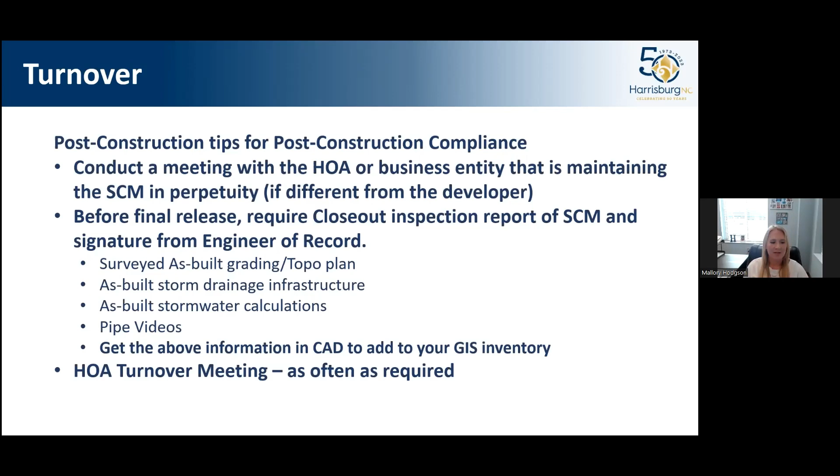It's very helpful for doing inspections and outfall inspections. And that HOA turnover meeting that I talked about, do that as many times as you need to. HOAs change all the time, so if it's something you need to just schedule with the HOA as their new board gets elected, just do it.

And then lastly—I've got a few more things, sorry guys. But maintaining that inventory of post-construction stormwater control measures, we use the GIS to document our inspections, and then document report compliance, keep contact info updated. It's really easy to export that information to Excel, so it's nice to have it geographically.

And then using other minimum control measures to target permit compliance. So that HOA meeting that I was talking about, you can count that toward public education and outreach. And your good housekeeping plan should obviously address stormwater control measure maintenance. So a lot of these areas overlap, and it's okay to take credit for them in more than one area.

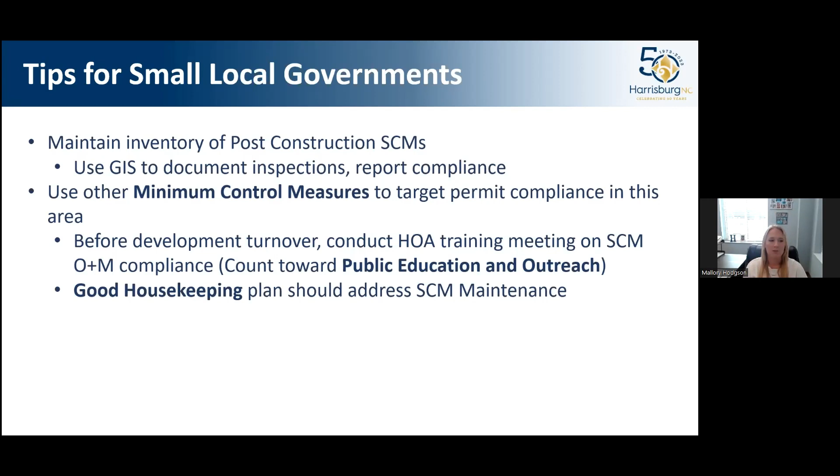So if adding positions to your organization is not the right option, and you decide to go the route of a stormwater consultant, the services they can provide your municipality are limitless. But if you're just getting started, consider having a consultant conduct stormwater document reviews. They can focus solely on post-construction.

You can do your own cost-benefit analysis to determine if your municipality could support an in-house person versus just administering a contract. They should be able to work on a task order basis for post-construction controls, and your contract should run with the fiscal year and not exceed it.

It might be easier to bite off some small tasks versus the entire phase 2 permit compliance. So those stormwater document reviews, administration of post-construction inspection, and then maybe doing post-construction inspections for your municipal facilities is another good way to engage a consultant.

So to wrap up, I wanted to share two other things that Harrisburg has done that kind of went off the path of the model ordinance. They didn't work for us, and that's okay. The sample ordinance does not need to be your municipality's ordinance.

One example I had was the establishment of the escrow account as it pertains to the HOAs. The sample language in the escrow account had a 15% developer contribution, then two-thirds of the cost to construct over 5 years, and then one-third over 10 years. It was ambiguous to us, and it left confusion on what the intent of where the fund balance should be.

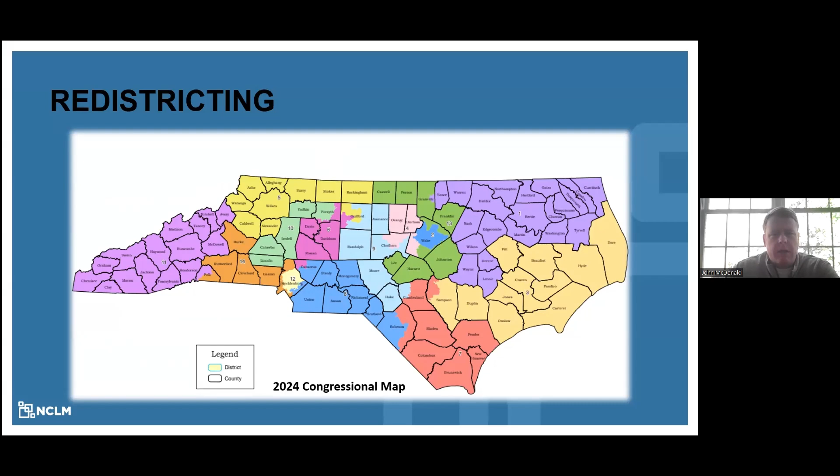Many people are registering as unaffiliated. North Carolina, for primary elections, allows unaffiliated voters to pick whichever primary ballot they want, so there is motivation for that. But we also know that young voters generally choose to register unaffiliated, and we know they lean heavily Democratic. There are some precincts within Wake County where it's 80+% unaffiliated voters, yet in the last election they voted for Joe Biden at the presidential level at about the same rate.

The current makeup was 71 in the House prior to Representative Cotham switching parties, and they needed 72 to have the supermajority right on the nose. Similarly, for the Senate, they had 30.

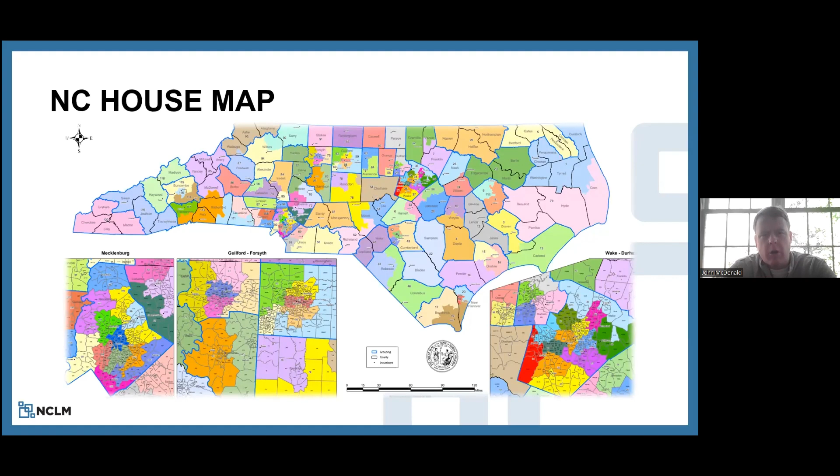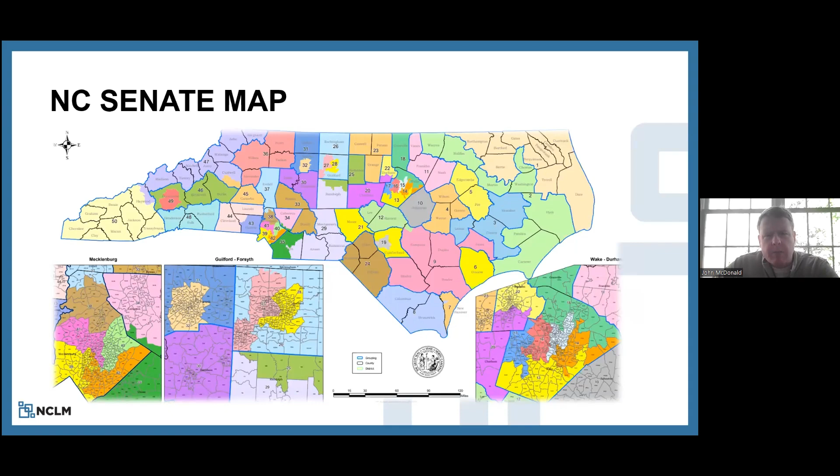The House map, it's difficult probably to see each individual district here, but this gives you an idea of how, especially in the rural, exurban areas, you have bigger districts with county focuses. But once you go into Mecklenburg, Durham, Wake, Guilford counties, there are much smaller districts within those counties. The Senate map is a little more county focused, but similarly in the bigger counties they're split up. And finally, the congressional map.

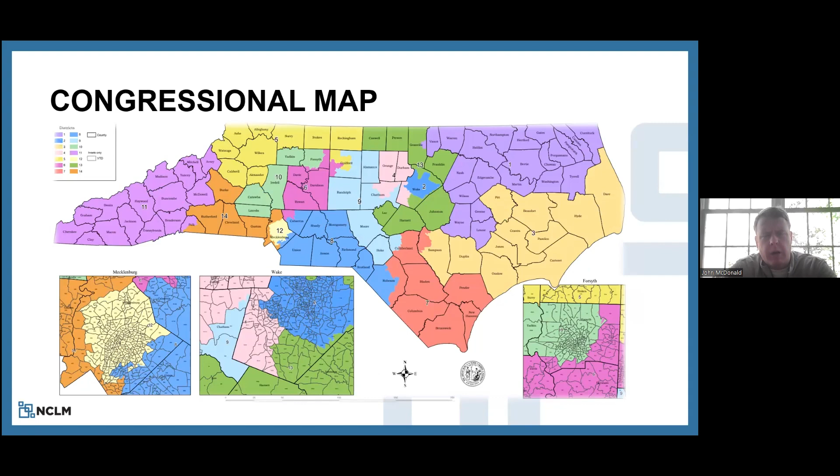This will be the iteration we believe that will hold for the forthcoming elections. The filing period is open here for the next, I believe, 13 or 14 days, and we'll have a clear view of who's running, who's retiring, et cetera, within all these districts.

Tricia Cotham's district is basically a toss-up type of district based on voter registrations in southeastern Mecklenburg County. The current minority leader, Robert Reives, has a Chatham County district right in the heart of the state. These will be the ones. Most of these other districts have a pretty strong partisan bent one way or the other, so whoever wins the primary is most likely to win those districts.

Now, having said that, in 2009 and 2010, Democrats probably felt confident they would be able to continue to hold their majorities within the North Carolina House and Senate and with the congressional delegation. But voter preferences change, and they change quickly. So while these are projections a year out, nothing certainly is for certain.

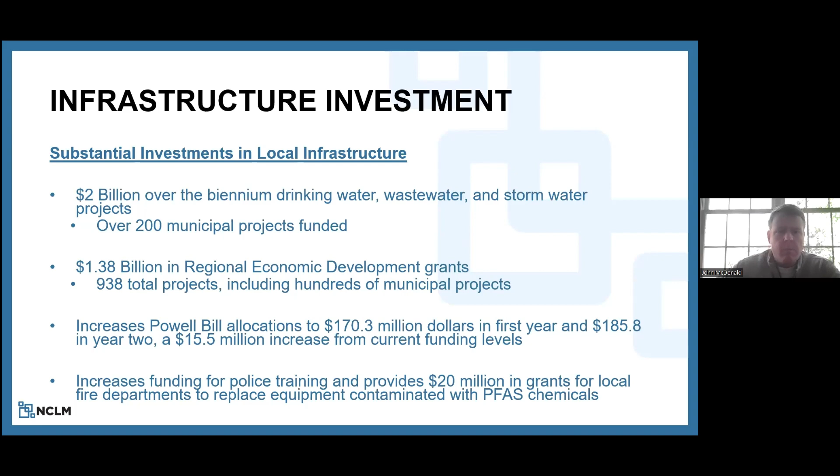And that brings me to a list of a number of the stormwater specific bills that moved.

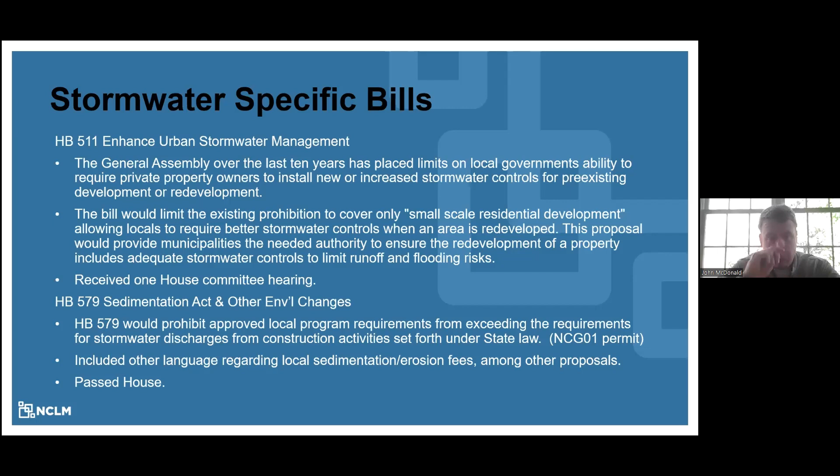The big Regulatory Reform Act, HB 600, passed this year. Frankly, it could have been much worse for those on this call. There was going to be limitations on vegetation controls, etc. I think we were fairly successful in limiting some of the negative effects that could have arisen here.

The big provision within this bill would require property owners to treat the increase in stormwater resulting from the net increase in built upon areas. They had to treat all of it. That is a change, and it will make it a little more difficult for municipalities to force the requisite stormwater controls needed. Further, stormwater rules were changed, including removing the DOT right of way from surface calculations.

And you have to take into account existing controls when determining stormwater fees for certain projects.

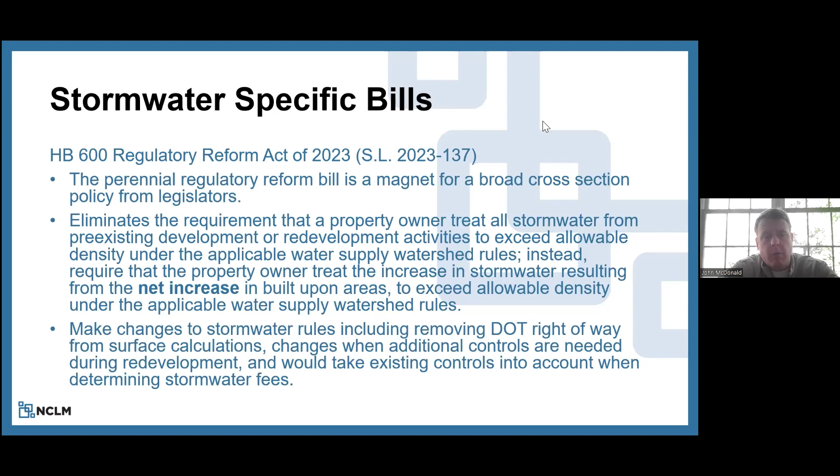This bill, SB 684, did not pass, although as noted here, portions of this were included in the budget as passed. This was really more aimed at DEQ. The frustration level with DEQ and timeliness for their review of certain permits, including stormwater, was very high with legislators. This is one of those areas where municipalities were doing far better than DEQ on timeliness.

So it would have set some shot clocks for DEQ. But it would also, and what was included in the budget, increase a number of fees that would allow DEQ to hire additional staff to meet some of these timeliness requirements.

HB 488 did become law, and as you see here, it limited the amount of fee to $100 per lot for lots under 1 acre. So if you had one large 100-acre parcel subdivided into 100 lots, the fee structure had previously allowed you to set one fee for the entire plot of land, but this would limit it to $100 per lot for each one under 1 acre.

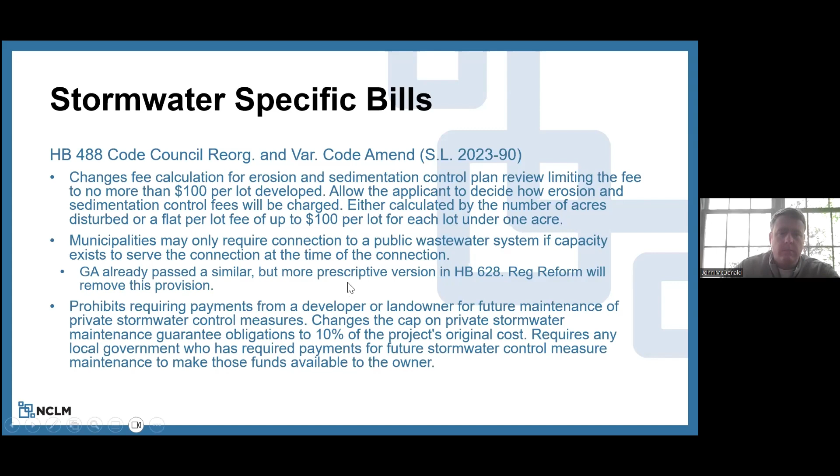SB 675 really drew the ire, frankly, of our membership, and they made legislators know. So it didn't end up moving out of the Senate and was amended substantially within committee even before it moved toward the Senate floor, because it was going to remove all extraterritorial ETJ authority for cities across the state.

For some of our largest municipalities, this was not going to be as big of an issue as it could have been for our mid-sized and growing municipalities. But at the end of the day, the Senate decided not to move forward with it, and the amended version would remove the ETJ authority for cities within counties with a population size less than 50,000.

The biggest town, I believe, in our membership that was affected by this would have been Roxboro. There was some other lot size and open space provisions that had been in the initial Senate draft that were also removed.

And finally, another one that had really drove a lot of engagement from our membership, HB 332, would create a shot clock of 21 days for commercial and multi-family planning reviews, and authorize developers to be able to go to a third party under certain circumstances. There was a lot of changes to this through the process. The Senate had a companion bill, and although we were in negotiations with the Senate sponsors on this, and we thought we were going to be able to get to a good spot had it moved forward in the Senate. It did not. This is one of those items, along with ETJ, that we're going to keep an eye on in the short session.